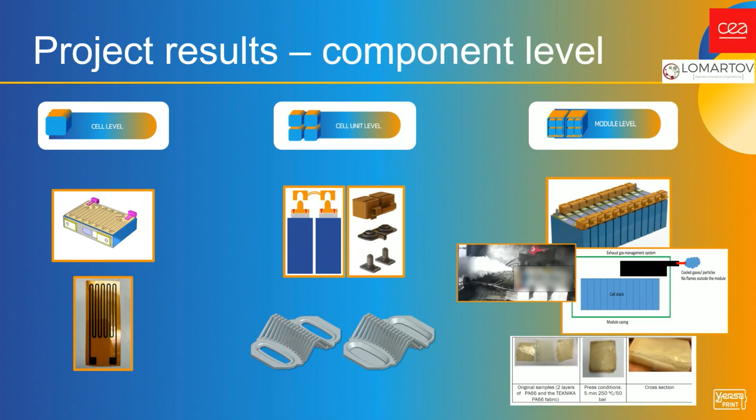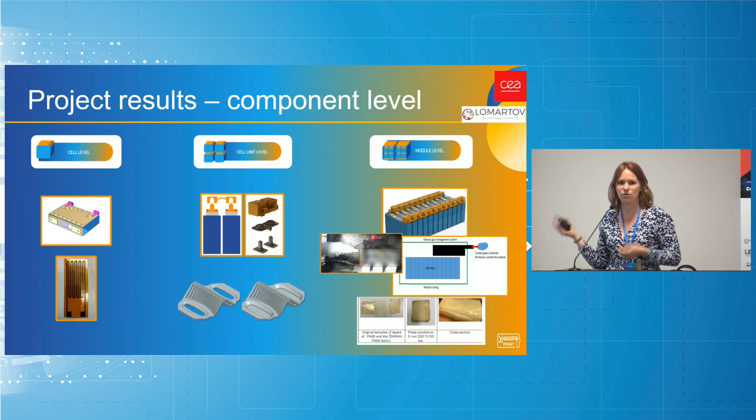And here at module level, you can see how we integrated all these components into real modules for different applications. This will be detailed later as well. And the exhaust gas system, where our aim was to have no fire outside of the module when there is a thermal runaway event. So this we managed, and this is a really great result. So don't hesitate to come to us if you want to discuss it.

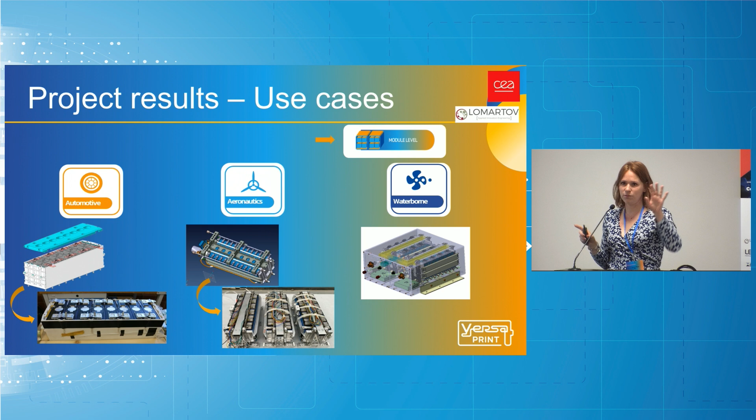Here you can see how we integrated it first into MIDI modules. And here you can see that we actually built real physical prototypes for different applications, so automotive, aeronautics, and for the waterborne, it was only simulated. And you will have objects there to see, and as well a physical generic module.

A small word as well. One goal we had also during this project was to develop a decision tool. This was done by the company ABI. The goal was to simulate a battery pack, and for this decision tool to tell the user which building blocks we developed to use for which application.

So for example, if one application, aeronautic, needs very lightweight and high safety standards, then it would mean that we would pick this and that component. For a different application where performance is more important, we would need this and that component. And then it would tell the user which combination of building blocks can be used. So this we also did during the project.

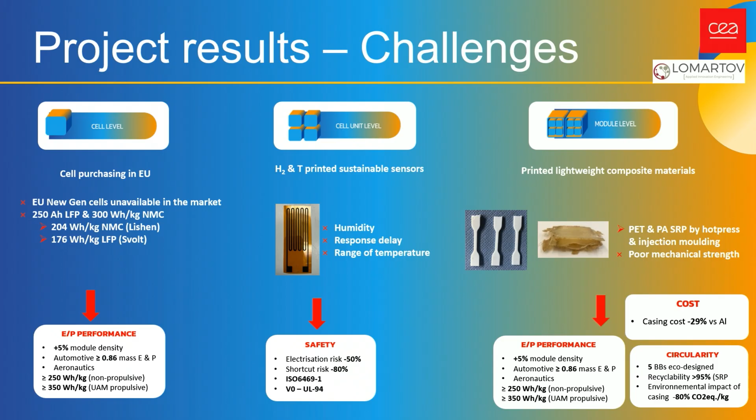Some challenges, because we are at the end of the project, and I think it's also important and interesting to see what worked and what was a challenge for us as a European project with 10 partners and with a limited time, so 3 years only to target all the objectives we have. And just quickly for you to know, one of the main challenges for us in the beginning of the project was to purchase cells to work on. As I said, we don't develop cells ourselves, we had to purchase them. And this was a real challenge to find European cells.

Those technologies, we also encountered challenges. So the printed sensors, we do have great results, but not optimized yet. And as I said, we also wanted to work with the team of LEITAT, and they are here today if you're interested to discuss this as well, to 3D print SRP, so self-reinforced polymer. As I said, the goal was to increase the energy density, so to decrease the weight. So we wanted to work on composite materials.

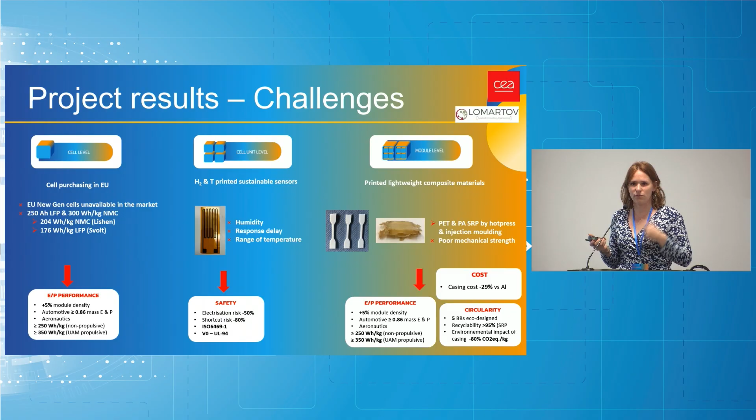And this polymer was successfully made, but the properties were not good enough to be used as casing. So it's also interesting results. So if you are interested, that will be with the team of LEITAT. A small word as well on sustainability. So Marco here will be here all day for you to discuss this with him.

We also had high objectives in terms of circularity during this project. So we eco-designed, and you can also discuss anytime how we did this. And we used a streamlined LCA where we evaluated and assessed the environmental impacts of all the technologies we developed, and as well of the integrated modules in the end, to see in reality what would be the impact. Do we decrease or not the environmental impact?

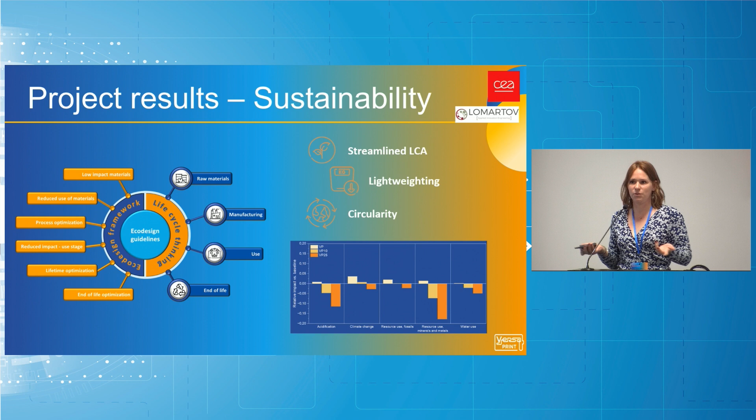I'm going to pass on this. This was our objectives and what we believe we achieved in terms of alignment with the European Circular Economy Action Plan 2020.

And last word on today. So today is part of our effort of dissemination. As we are a European project, we have to disseminate our results and communicate and share and create next projects and next collaborations to continue working on them.

We have scientific papers that were published during the project. If you're interested, don't hesitate to scan this QR code. It will bring you to our community on Zenodo. So this is a public community where you can see not all our datasets, but the public datasets, and all the papers and anything that is public.

So we do have a lot of results and data, so 24 in total for the moment, more to come on Zenodo. And yes, if you have any question on this, don't hesitate to look there or ask us, because this is also an interesting part of this project. And this event today is to show you what we did, basically.

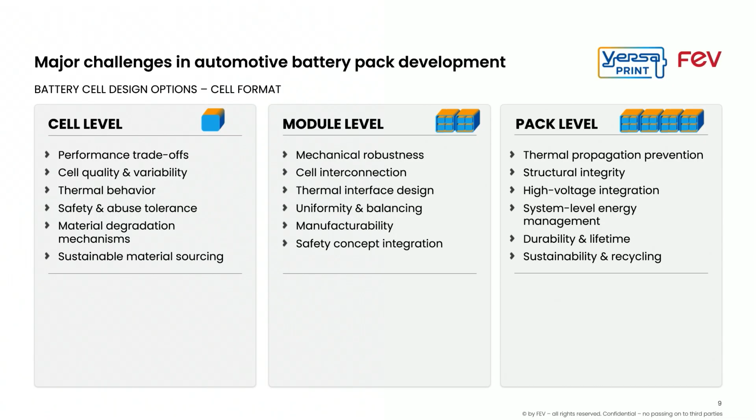Then, of course, we've got the pack level. Most important, probably the thermal propagation prevention. So any barrier design within the battery cell or the battery pack, the venting concept of the battery pack, coolant concept, very important. The structural integrity of the pack, crash behavior, intrusion, repairability. We are also talking about the high voltage integration, so electromagnetic compatibility, isolation, BMS, of course, always a very important topic, and system level energy management.

So how do I optimize the range of the battery pack? What are my fast charging capabilities, load cycles of the pack? And then we've got durability and lifetime of the pack. So what are the road cycles? How do I deal with environmental conditions, salt, moisture, etc.? And sustainability and recycling. How do I dismantle my pack after the life? Is there a second life application? And what about the carbon footprint?

So there are a lot of challenges, as you see, in the pack development. This is obviously not only true for the automotive industry, but all these topics can be summarized under performance, lifetime, safety, and circularity. And this is what Lisa Lu just addressed. So these are also the main topics for VERSAPRINT. And especially if you want to integrate this in the automotive industry, where there's always a super high cost pressure, all the applications and everything that you are developing needs to be cost effective, otherwise it has no chance to find its way into the real application.

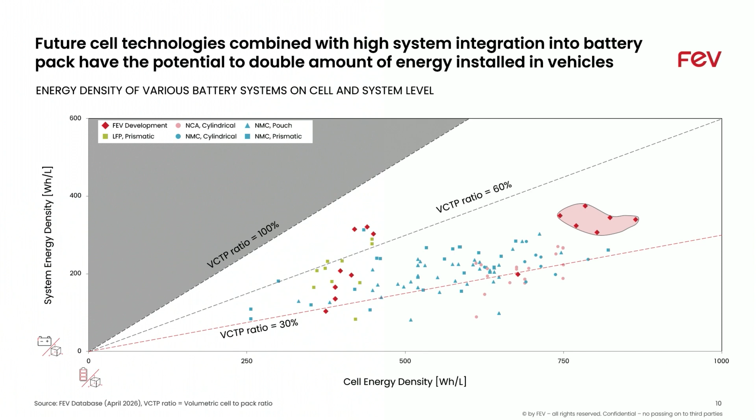Then I have one slide maybe to also give a little bit of a future outlook. This is also a slide that was completed by colleagues of mine. It's based on the data that was collected by our company. You see on the x-axis the cell energy density, and on the y-axis the system energy density. So what this graph shows is how well I integrate my battery cell into the system to gain the most energy density on system level. So if the dots are moving further to the right, this is a cell optimization topic. If it's moving further up, this is a pack integration topic.

And what we currently see is that battery packs that are currently state of the art are reaching a VCTP. So this is the volumetric cell to pack ratio. So they're reaching a VCTP in between 30 to 60% basically. And I want to point out two areas here. The first one are the green dots. These are all LFP cell-based pack integrations. And you see that the LFP cell has a lower cell level energy density, but they are reaching higher VCTP ratios. This is due to a reduced system level TP measure. So you need less TP measures in the pack to make it safe and to make it ready for the market. So in this way, the VCTP ratio rises.

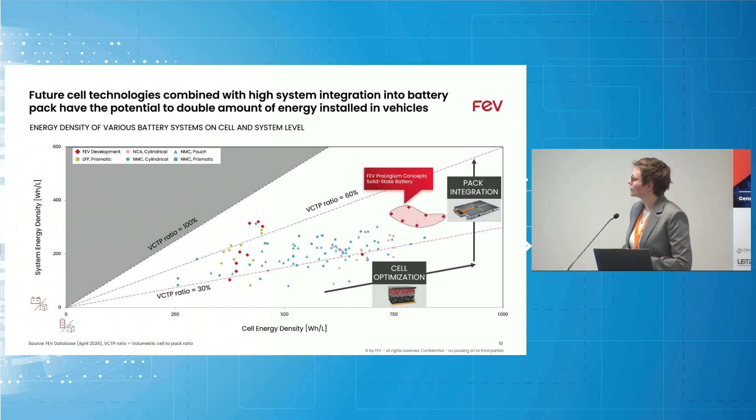And the other area that I would like to point out is the one that is circled in red and marked with the ProLogium concepts for solid-state batteries. So everyone's talking about solid-state batteries. ProLogium is a company in Taiwan developing, these are semi-solid-state batteries. And FEV developed a few concepts with different cell types, and you see that the cell energy density is much higher for these cell types. So we are reaching quite well also VCTP ratios. So this cell technology has probably a very promising future because it also meets the target of the safety, the lifetime, circularity, and also the performance of future battery packs.

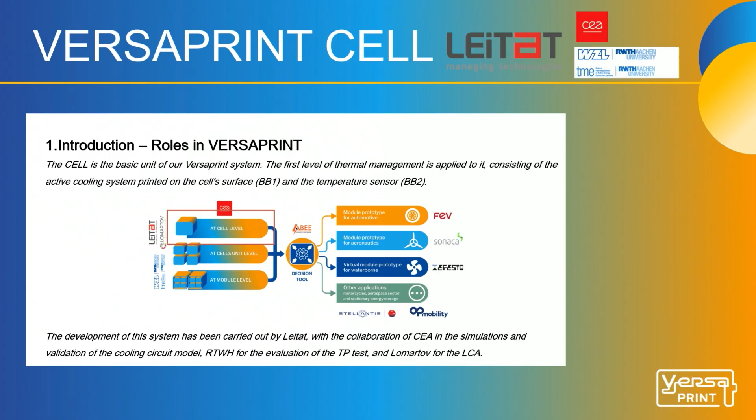The first technology was this cooling circuit that can be printed directly on the cell surface, and that is building block 1. And the other technology is this temperature sensor, also printed over flexible substrates, that can be attached over the cell surface. This development of these systems has been carried out by LEITAT with the collaboration of CEA for the simulations and validation of this cooling circuit model, RWTH for the TP test, and Lomartov for the LCA.

The concept of this BB1 consists of this coating with embedded microchannels that are located between each one of the cells in the cell unit and the module to perform this active cooling. This coating is applied directly over the cell surface, and it's aiming for a thickness around 3 or 4 millimeters. These internal channels are 3D printed using a sacrificial ink. The shape of the channel can be easily adapted by 3D printing, and is embedded within these 2 layers of this material.

This coating material was a challenge to select, and finally it was decided to use one kind of silicone that is easy to mold by casting techniques to achieve the geometry we want for the coating, can withstand high compressive forces, and can be easily detachable to ease the recycling. All these channels are later connected to the cell module.

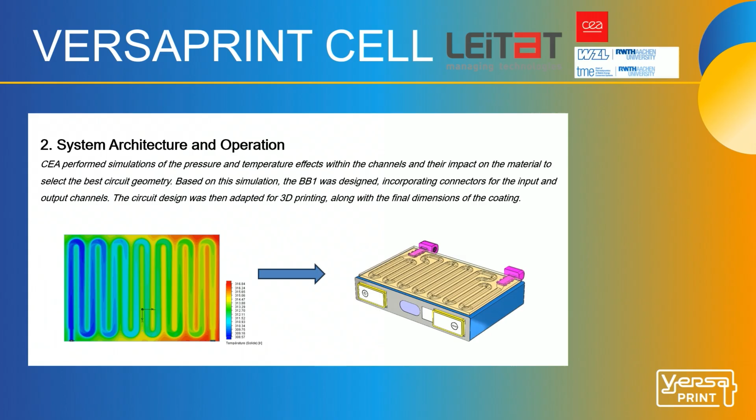For the configuration of this BB1, it started with simulations of the circuit performed by CEA, of the pressure and temperature effects within the channels and their impact on the material, to select the optimal configuration and geometry for the circuit. Based on these simulations, the BB1 was designed, incorporating connectors for the input and output channels, and all the circuit design was adapted for the 3D printing and to obtain the final size and geometry of this coating.

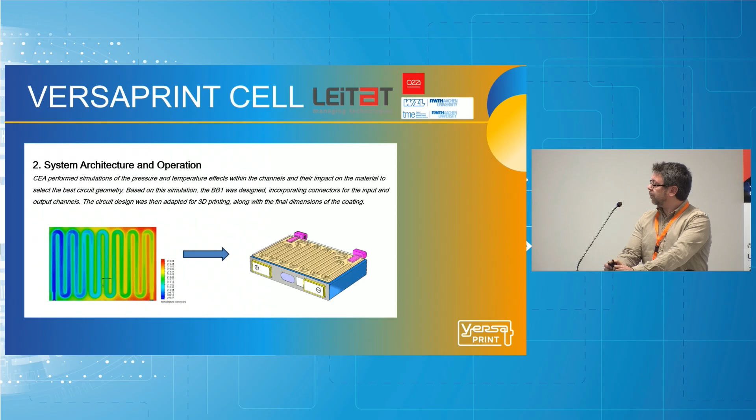Here I explain briefly the process for the 3D printing of the channels. As this, the configuration of the channels has to be embedded between the two layers of the coating material. The ink that is printed to print the circuit has to maintain this structure during the silicone curing process. For this purpose, we selected a sacrificial thermorheological ink, whose viscosity decreases with temperature. So at room temperature, it behaves like a gel, but once cooled, it liquefies, and it's easy to remove from within the channels.

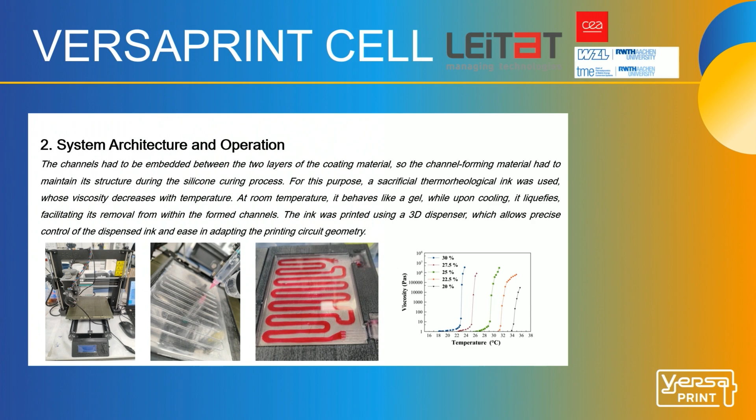This ink was printed using a homemade 3D dispenser, which allows a precise control of the dispensed ink, and it's easy to adapt to different geometries and circuit sizes. Once we have this system with embedded channels and the silicone cured, we can empty the channels and mold the system for the BB1.

The second technology was this temperature sensor for the BB2. It was designed with sustainability in mind. The goal was to create this sensor printed on flexible substrates to be easily attached to any surface, and using a water-based ink formulated with conductive carbon particles and bio-based additives.

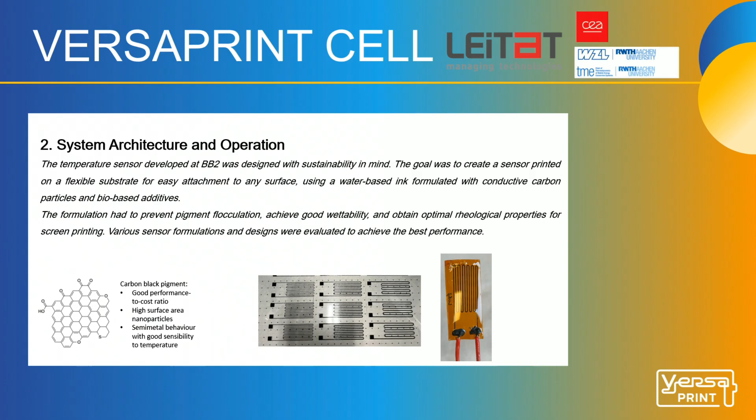This carbon pigment presents a good performance to cost ratio and a high surface area of the nanoparticles to improve the wettability and coalescence, and presents a semi-metal behavior with good sensitivity to temperature. This ink was formulated to prevent flocculation, achieve good wettability, and obtain optimal rheological properties for printing by screen printing. And several configurations and geometries were devised to select the one with the best performance.

Now, as for the results observed in the development, this cooling system was validated. We can obtain these circuits that can be adapted also for different types of cells, such as NMC and LFP. And the initial performance test demonstrated a cooling effect of 15 degrees compared to cells operating without this active cooling. We printed several of these to be validated in the model systems of the different end users.

For the temperature sensor, it was designed using this sustainable ink, with water as the main solvent, and using bio-based reagents. This ink can be printed on these flexible substrates, and it can be integrated under the BB1 for a complete thermal management of this cell. We observed that the ink exhibits a negative temperature coefficient, meaning the resistance decreases with increasing temperature.

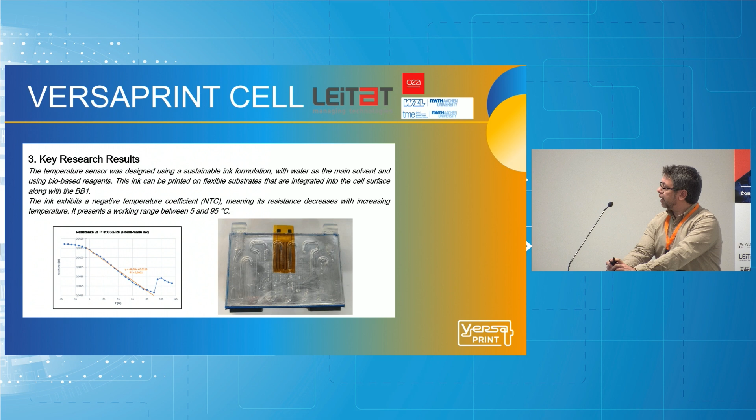So the main challenges and next steps for these technologies: the first one, and probably the most important, is the material that forms the BB1. We need to look for new materials that are more robust. This silicone is versatile, easy to handle and can support high compressive forces, but it's a soft material and weak under puncture and shear stresses. And this also applies to the connector, which needs to be more robust for handling.

Another key aspect derived from the LCA analysis is to select a product that does not contain these platinum-based curing agents, so we can increase the sustainability of this device. For the temperature sensor, the main challenge we faced was achieving good performance using low-toxicity and bio-based additives and reactants, but we need to work to increase the stability and operating temperature range.

This is a summary of the key exploitable results. For the BB1, we achieved a TRL of 5. It can be adapted to different cell configurations, and it has a limitation in the printing process: it must be on flat surfaces, but it's flexible enough to be adapted to other geometries, for example circular. And it can be transferred to sectors that might need some type of thermal management, for example wearable electronics, textiles, robotics, where we need this thermal management integrated in these systems.

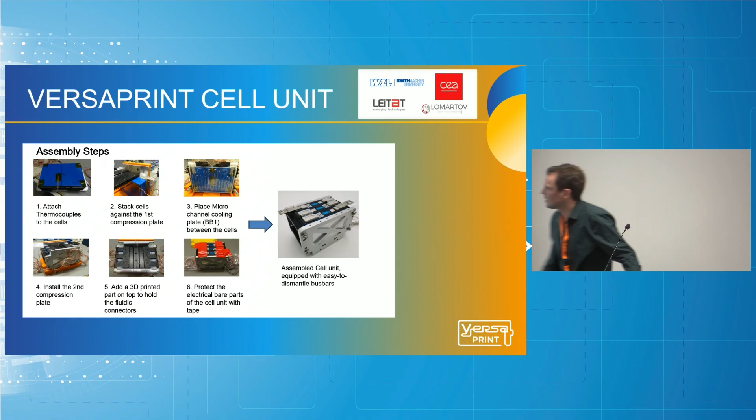In the end you can see this MIDI module here on the right with 3 cells connected with our easy to dismantle bus bars. You can see they have these single wires here. This is a laser cut, and the forming was made with our 3D printed forming tools. I have also some outside. You can have them in hand if you're interested in that.

Next. So for the bus bars, we had 2 different BBs. So the multifunctional bus bars made by LEITAT. They were initially made from copper, but this didn't work. So we switched to aluminum powder, melted and 3D printed together. So as you can see here, you have these single wire connections printed out of aluminum for the first, and on the right also for the second life cycle of the battery when you disconnect the single wires.

What is the multifunctional here? This is mainly the first and second life cycle application, and as well it's for cooling if you increase the surface. There were several different other concepts as well. So breaking these wires with a hexagonal screwdriver. This was, for example, another option here, but in the end it was not the best concept, and here we have only the best.

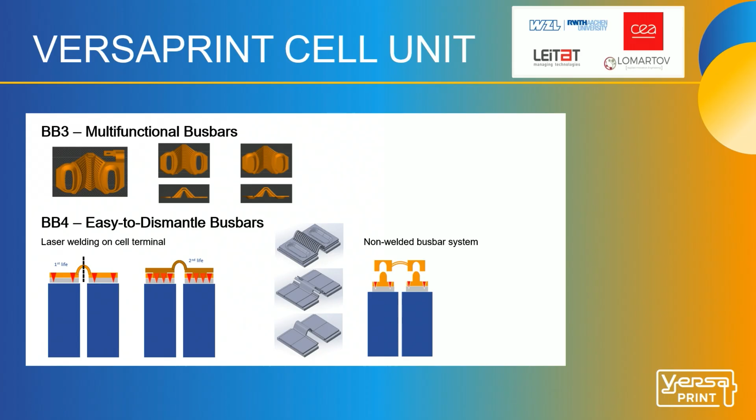The second is a so-called H concept, where the main topic is to halve the surface used for welding, and in the second life you can add another bus bar without losing connection area. And in the bottom another concept, very similar, half and half, so the full surface of the cell terminals is used, with very similar performance indicators here.

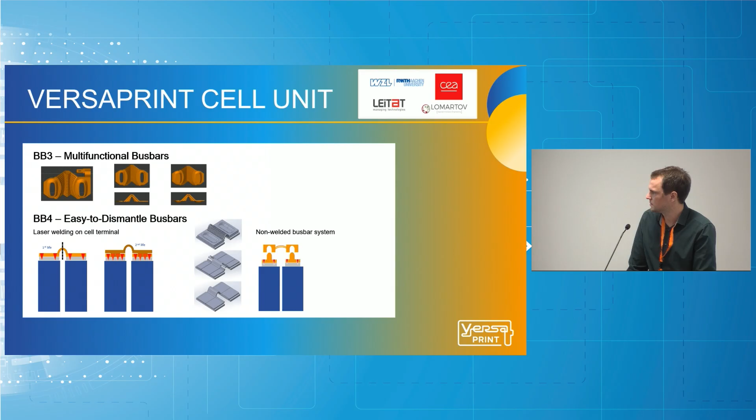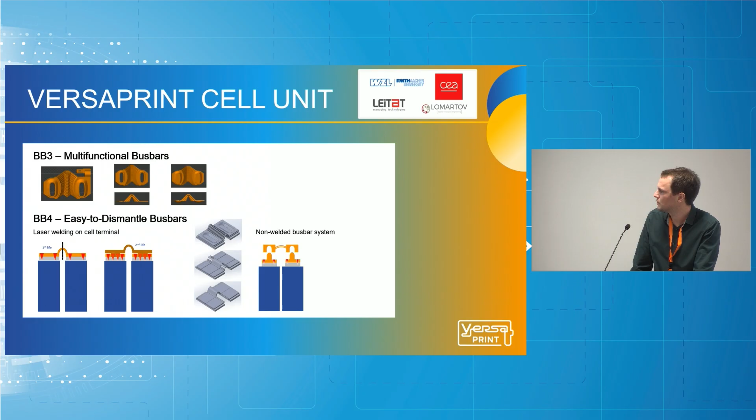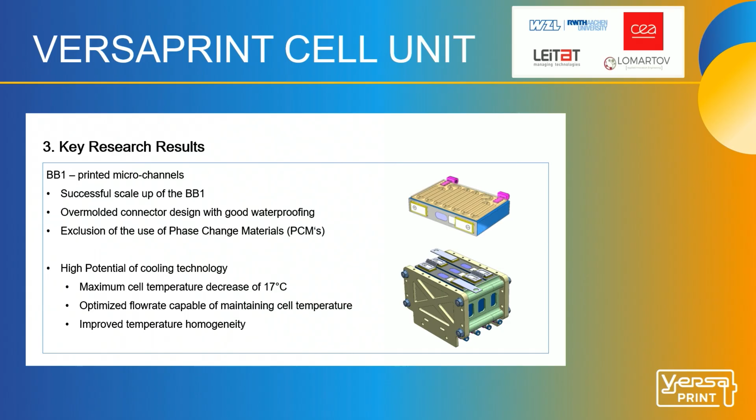So coming to the key research results, BB1 was also part of the cell unit module, so that's why you can see this again here. So in the end, we had good performance from the cooling, increasing the homogeneity of temperature inside the module. I think that's a very good result here.

On the other BBs here, you can see copper was not suitable, so aluminum showed very good results here. It's easy to dismantle by cutting these wires, and as well they can be used as fuses in the module. So if one cell is defective, you will not have a full thermal runaway of the complete module.

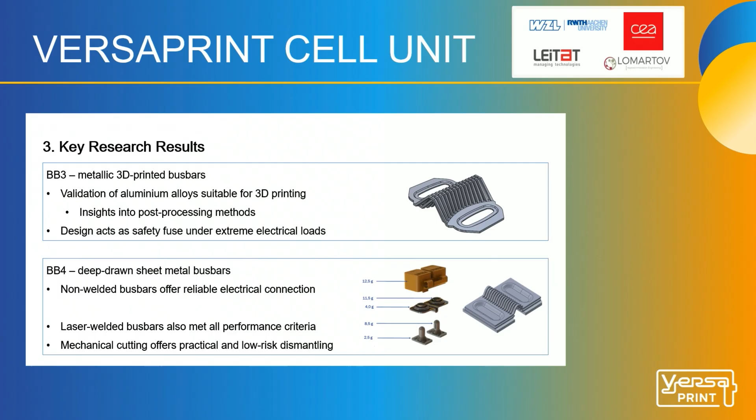Going down here to BB4, our bus bars, you can see we had these non-welded ones made from Molex, these connectors here in the bottom, very heavy as well, not only expensive but also heavy. And on the right side you can see our laser welded bus bars made from sheet metal aluminum, very easy to form. We did it with 3D printed PLA forming tools. And the function to dismantle is the same as in BB3.

So the main challenges and next steps: BB1 performed very well, but the production process is still a problem. Increasing the size, etc., is still a problem, and we were here only on cell unit level, and for a complete battery module, more testing will be needed.

For BB3 and 4, optimizing, as Johanna said, is always a problem for battery modules. So this is also a topic here regarding our bus bars. The optimal point for all the factors is not easy to find. Optimizing weight, cost, and performance, they're strongly connected to each other. And for end applications, we are on TRL level 5 with our BBs, and for further research, we need some more applications in future.

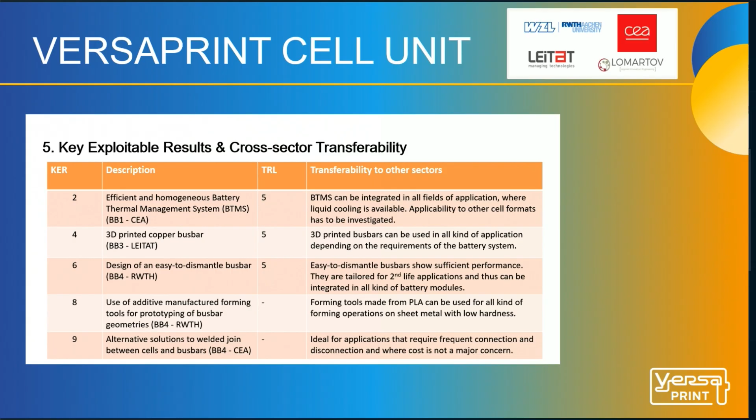So coming to the key exploitable results, you can see again what I have presented. In conclusion, BB1, efficient and homogeneous battery thermal management, did very well. 3D printed copper bus bars were changed to aluminum. Easy to dismantle bus bars are also on TRL level 5, and they performed very well in comparison to the reference bus bar without these wire connections.

What we did as well, as I said, forming tools made out of PLA. I did not write down any TRL level because it's always different to design these tools. You have a lot of prototyping on that, so it works with good results. And in the end, also these alternative solutions to welding, our Molex connectors built into the bus bars. I also did not write down any TRL level because we just had this application, no further testing on that.

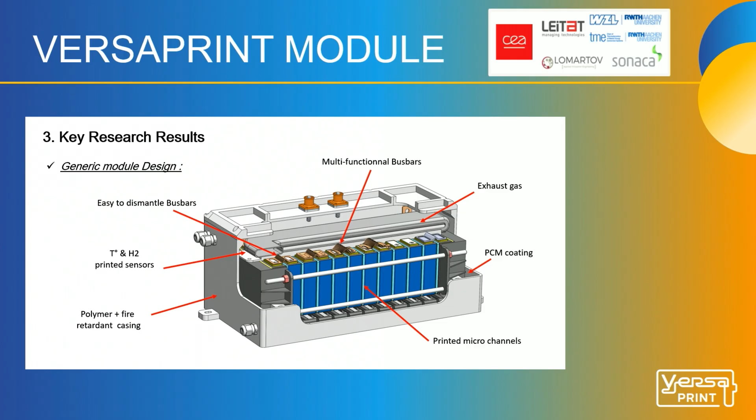We can see also the integration of printed sensors for temperature and hydrogen sensors. The main component with polymer and fire retardant casing, it is the main BB5, BB6, what I will present to you today. In the 3D printing process, it's to integrate all components inside the safe case in order to manage the thermal management and all thermal propagation afterwards. And you can also see where we can spray a PCM coating inside the casing in order to manage easily the thermal dissipation during the performance of the batteries.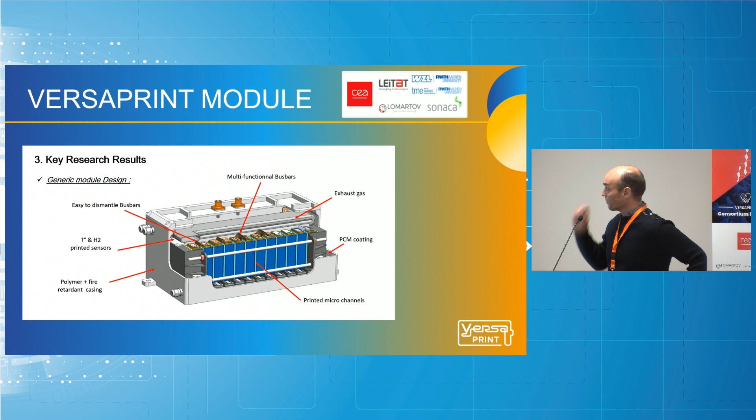So we've done a prototype, manufactured the prototypes, done several thermal runaway tests, and at the end we divided temperature by 2 during the thermal propagation. And just keep in mind, we do not optimize weight and cost during this first step, and maybe the industrial partner will add some evaluation and some information about these parameters.

What will be the main challenge and next step to develop the BB5, BB6, and BB7? So just to remind you that the BB5 is to develop self-extinguishing polymer, and LEITAT have done several materials regarding the self-extinguishing polymer, and there is some issue regarding the mechanical properties, and that's why we used PETG commercial material to print the final geometry casing in order to do the thermal propagation tests. So today we need to go deeper in R&D to process this kind of material with SRP, and specifically for the printability. It's not with

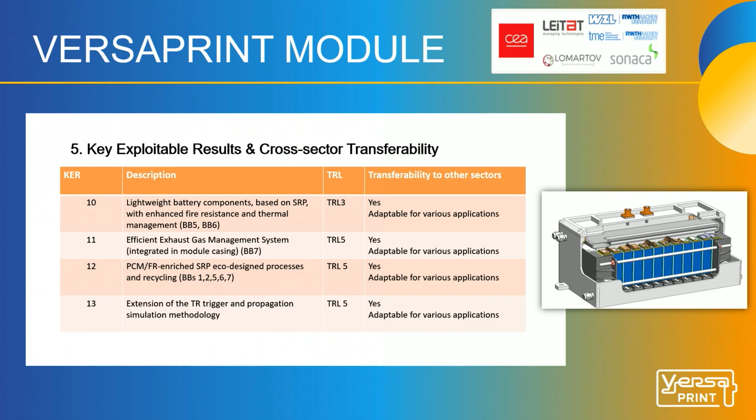And in parallel, we made some simulation with RWTH in order to calculate and simulate all thermal aspects during the thermal propagation on one cell, and that allowed us to develop this kind of architecture with all components inside this generic module. That's a real platform in order to develop industrial applications.

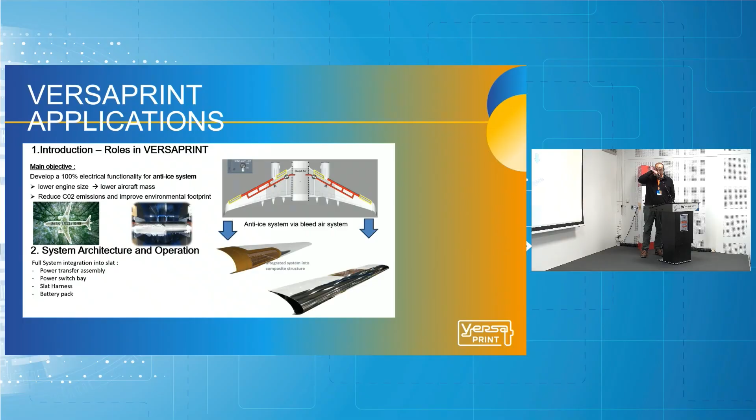So the objective here is to present to you a dedicated application using prototypes developed through the VERSAPRINT project. As explained here, we have tried to use the VERSAPRINT solution for our end application. As you can see, on commercial aircraft you have some functionalities that we can electrify. Here we selected a dedicated application for the anti-icing system.

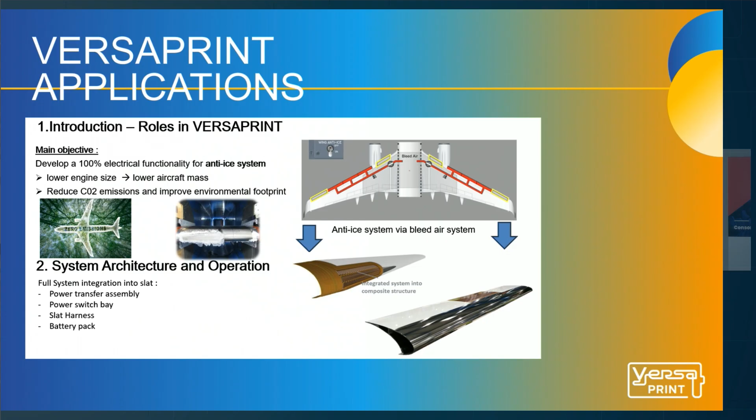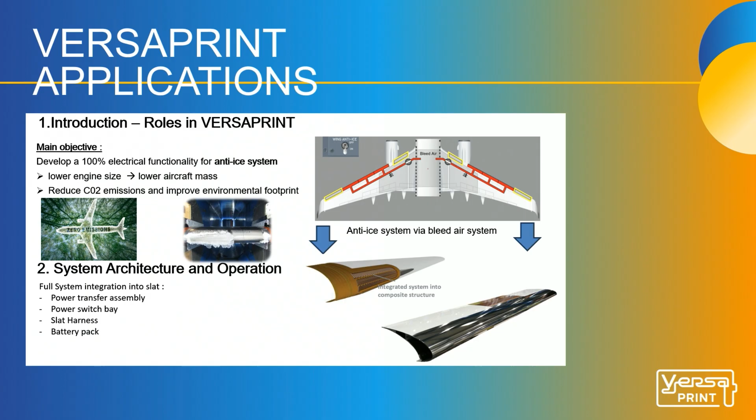All commercial aircraft need to be anti-iced during flight for safety reasons, to avoid ice around the wing during flight in extreme conditions. As mentioned here, the objective is to decrease the size of the engine with integration of electrified solutions. The objective here is clearly to integrate the system inside the structure for de-icing functionalities, and then we need to put some battery in front to provide sufficient energy to de-ice this structure.

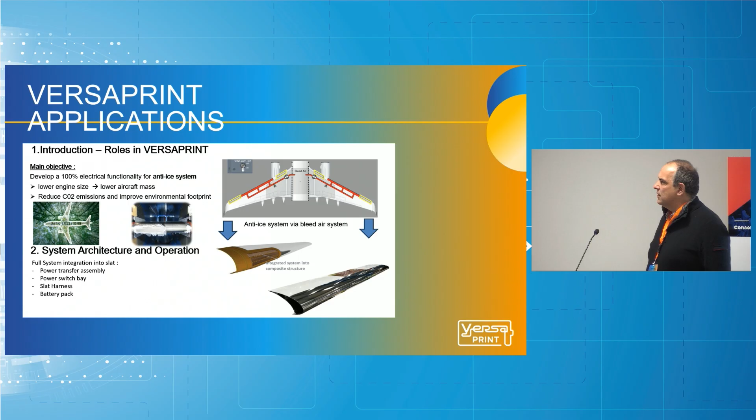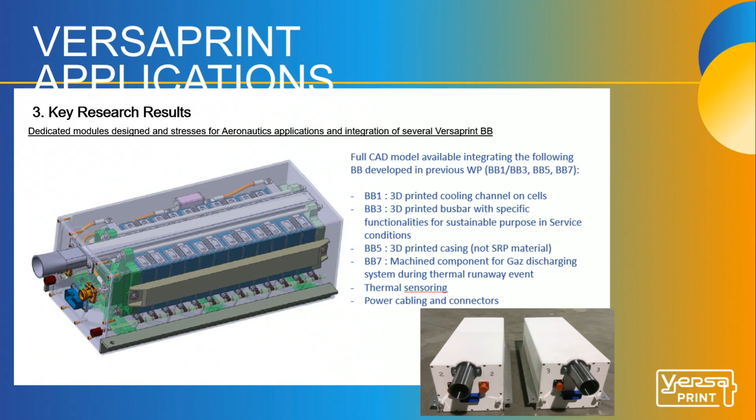As you can see here, we have developed and selected different building blocks, mainly focused on 3D manufacturing processes. The detailed results are on the left side, and you have the prototypes on the right side. So based on this module, we performed design and stress analysis to validate the mechanical performance at the module level, to be sure that we will have no major issue during the mechanical testing campaign.

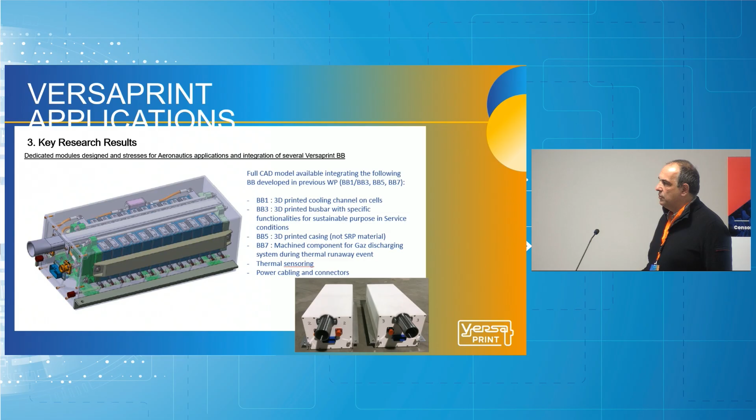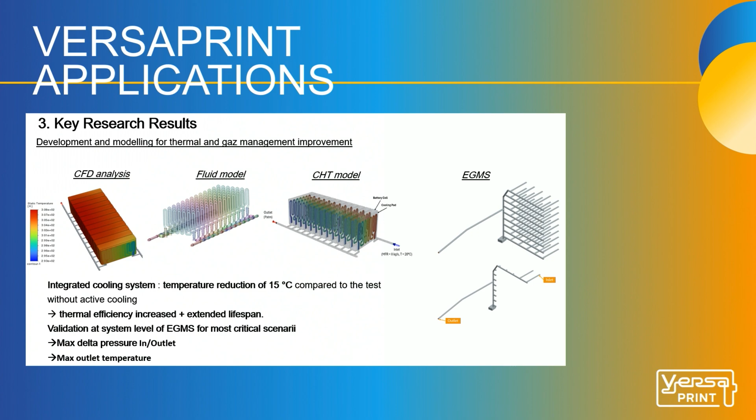Based on the fact that the casing was not SRP material, we took the decision to reinforce the internal structure at the module level to be sure that we will have no issue during the shock and vibration campaign. So we performed all the mechanical simulation in static, fatigue, shock and vibration. In the meantime, we also performed a dedicated test campaign to demonstrate that we will have no issue at module level.

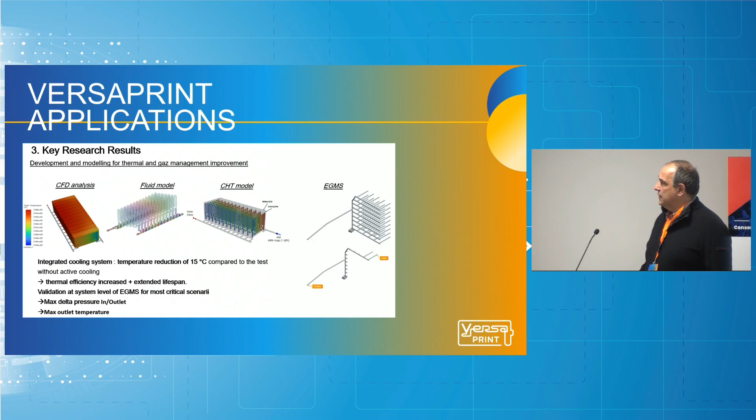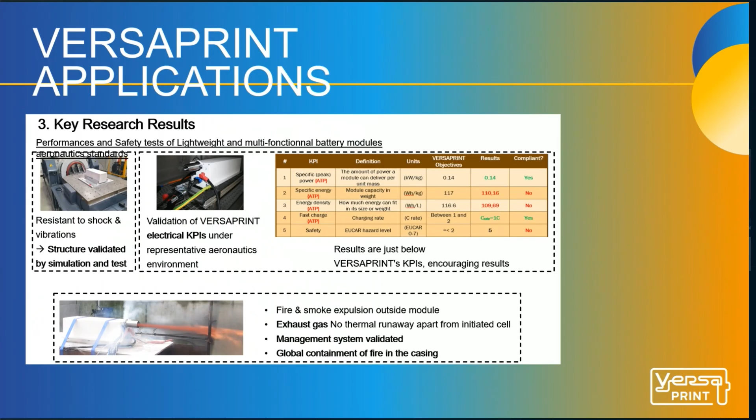Based on that, as mentioned before, we obtained different key results. One focused on structural behavior in shock and vibration tests. We performed the solicitation and the test in different axes with relevant acceleration that we have in aeronautics procurement specifications. All these tests were done in Belgium and fully in line with our expectation.

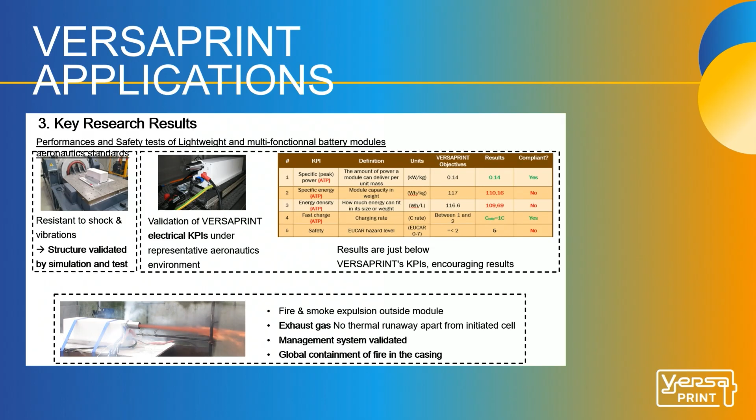The second key point, more focused on electrical KPIs, was done with the FEV team, where we performed some environmental tests, and you have a synthesis here of the main results. As you can see, on some points we are in line with the requirement, and for two dedicated points we are close to the target, but not in line with it. But it could be explainable, and we are happy with these results. So that's an important point also.

And the last campaign was done by a CEA team, a thermal propagation test. Here, as you can see, we have a lot of fire outside the structure, but it's in line with our expectation. And it's a gentle reminder here to be careful about the potential safety issues that we can meet in service conditions.

So it was very impressive to see this test campaign, and it's clearly a strong reminder for us regarding the safety approach, and to be sure that at the end, if we put this type of battery in our aircraft, we have to be aware and be careful about this dedicated point.

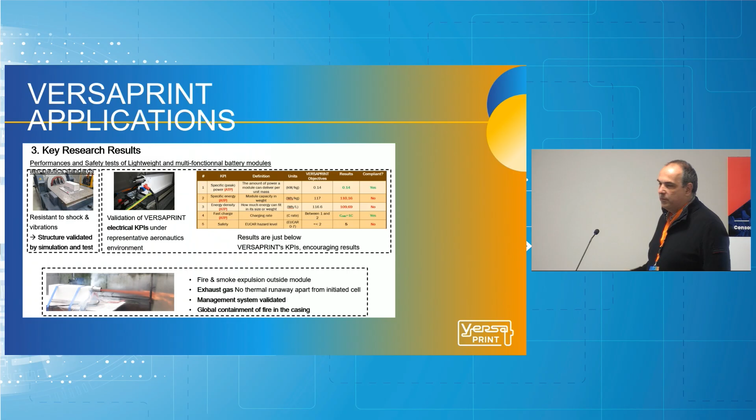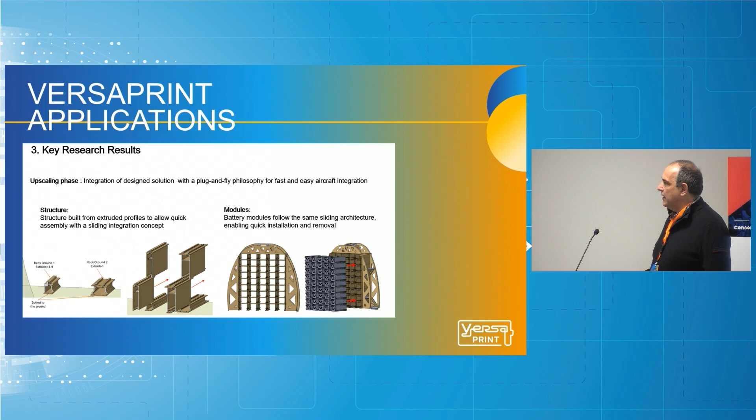Regarding the last step of our results is the upscaling phases. So we worked to characterize the module level, and then we switched to the upscaling phases based on our end use case. And as you can see here, it's quite large and big solutions that we can provide here. And so, as you can see here, it's more focused on the sliding concept because we would like to develop a plug and play and plug and fly solution to be sure that we save time in service conditions.

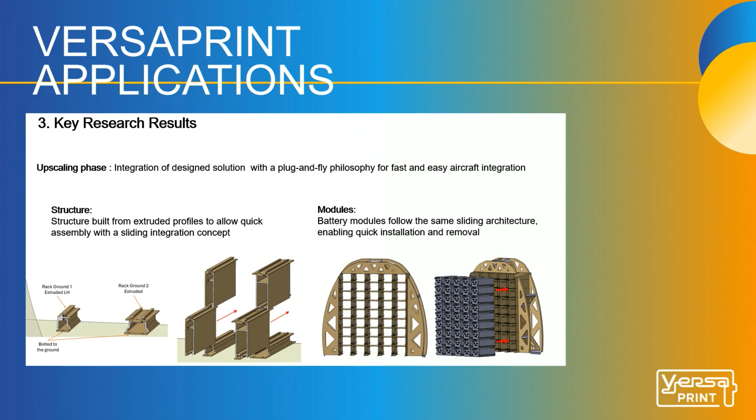So the time is running in service condition, and for sure we need to reduce this time to be more efficient on the floor during one flight scenario. So based on that, we have developed different solutions regarding the venting functionality and regarding the electrical aspect. The objective at the end is to save time if we have to remove one module or one battery unit in service condition, to be sure that we can remove it easily during the flight. So that's the reason why we focused at this stage of the project.

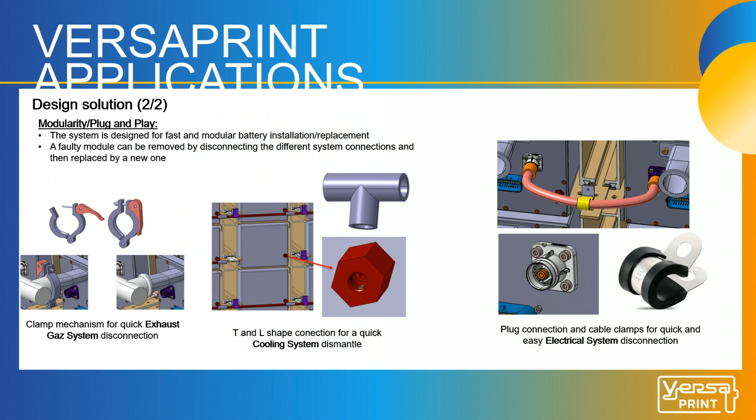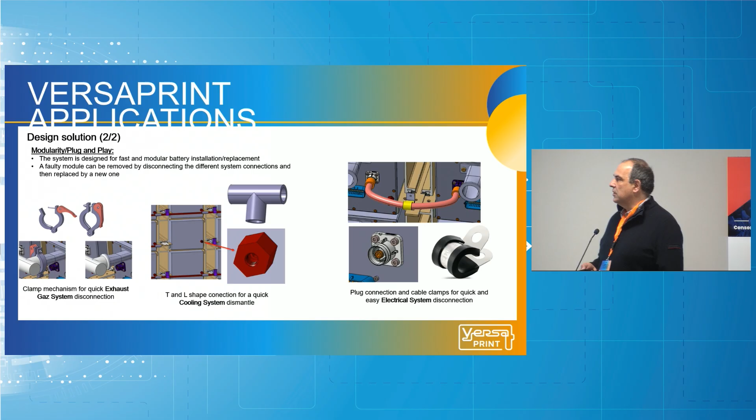We are focusing to develop plug and play solutions, because time and cost are key parameters for us in service condition, and we need to develop solutions for end users and for our customers in line with this target. So regarding the challenge, we are not specialists of batteries and cells, but for us, it could be interesting to improve the size of the battery cells to allow us to integrate it in a different location. As mentioned before, it was integrated in the fuselage, but we are quite confident that for our dedicated application, it will be better to put it in another location.

For the moment, the main limitation is the size of the cells itself. It's too big for us, compared to the performance itself. So the objective and the next step for us would be to work on it and to improve the total mass. It's clear that all the building blocks developed in the framework of the VERSAPRINT project are in line with our expectation regarding the target weight. But it's clear, based on a quick calculation that we have done, that the battery module and the battery cells are the main contributor of the weight, and the objective is clearly to reduce that.

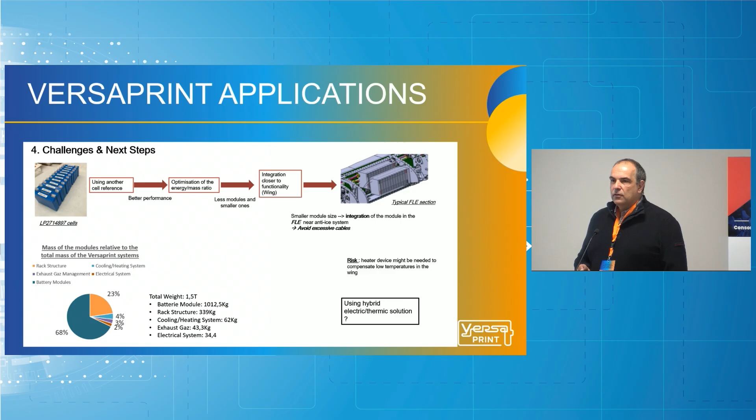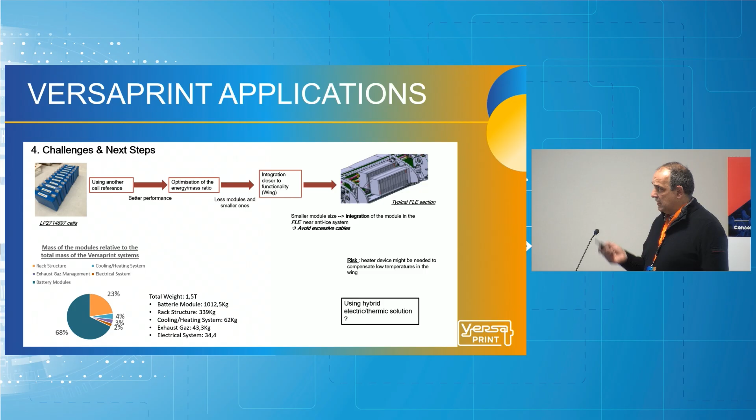Because to have 1.5 tons covering this functionality, it's a good starting point, but we are quite confident that we can reduce this total weight working at the cells level, because at the other level, as mentioned before, all the different building blocks based on the 3D printing solution and so on are in line with our expectation. So the next step for sure is to work on the cells technology.

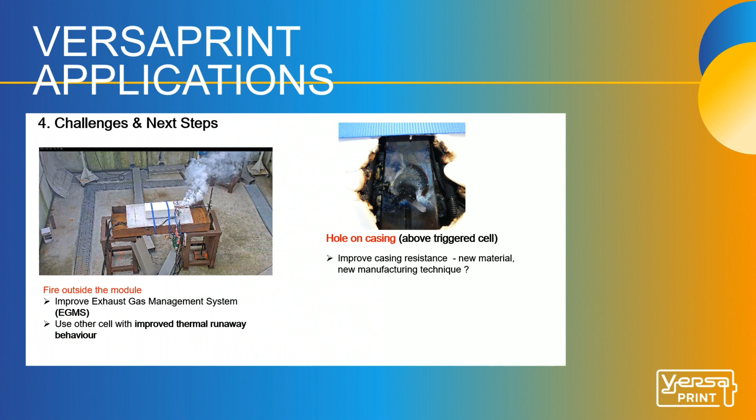Regarding the challenge, yes, the first movies, it's one big challenge for us, clearly. So it's very important for us. We are very impressed by these results, and keep in mind that it remains a challenge when we have this type of behavior inside the fuselage of the aircraft. It's not so easy to manage. So it's one major challenge for us, for safety first, for sure.

And the second point is regarding the casing resistance. For sure, it was a very interesting solution with 3D printing processes. But for us, it makes sense to work on it, to select new material for self-reinforced polymer technology. Then we can decrease the structure in size, with a similar mechanical behavior. And at the end, if we integrate more functionality in the same space allocation, the final solution will be better for everybody with weight and cost saving development.

Okay, regarding the exploitable results. For sure, we have two dedicated points to cover. The first one is regarding the development and modeling of thermal and gas management. We have done with all partners a very interesting job regarding modeling activities. So for us, it's a validated point. And the second point, as mentioned, regarding all the building blocks, it's clear that a lightweight and multifunctional solution has been developed. In the framework of the VERSAPRINT project, we are in line with expectation. The only attention point, as mentioned before, is at the cell level, and we are quite sure that if we improve that, we will improve the final solution for our applications.